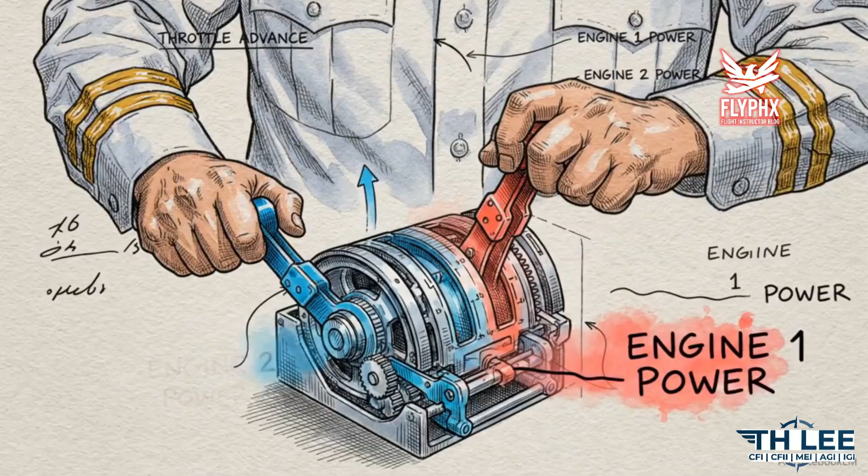To the pilots taking this lesson to advance their skills and careers, this briefing details the specific legal and documentary requirements for professional aviation operations.

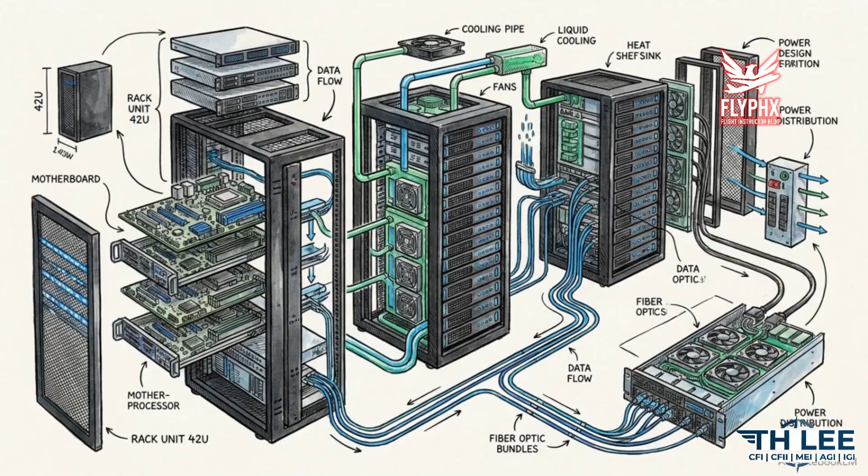Your legal identity as an aviator begins with FAA Form 8710-1. Signing this application acknowledges the Pilot's Bill of Rights and the Privacy Act, allowing the FAA to use your data for certification investigations. This information is integrated into the Safety Performance Analysis System and the Air Carrier Analysis Support System, and it documents your status regarding DOT-required drug and alcohol testing.

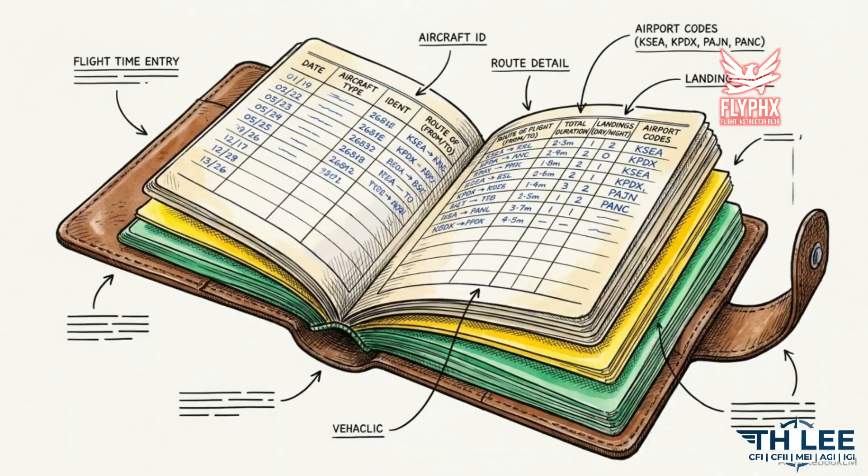Once certified, your operational history must be documented under Part 61. For a logbook entry to be legally binding, you must record the date, total flight time, departure and arrival locations, aircraft type, and flight conditions.

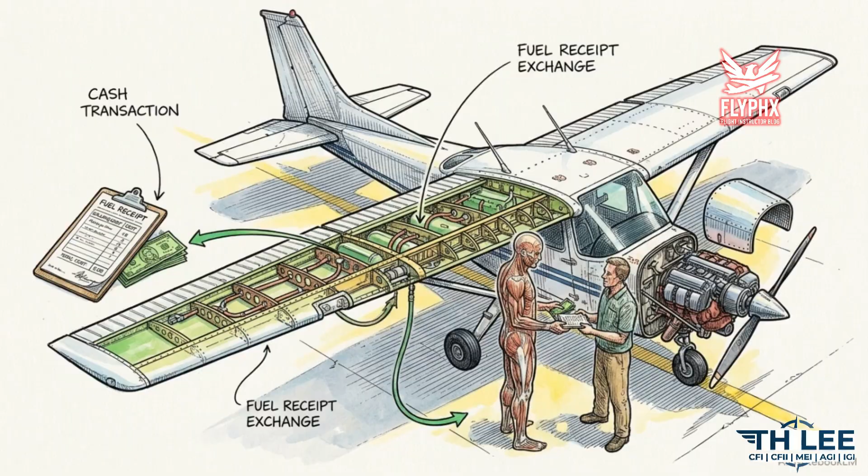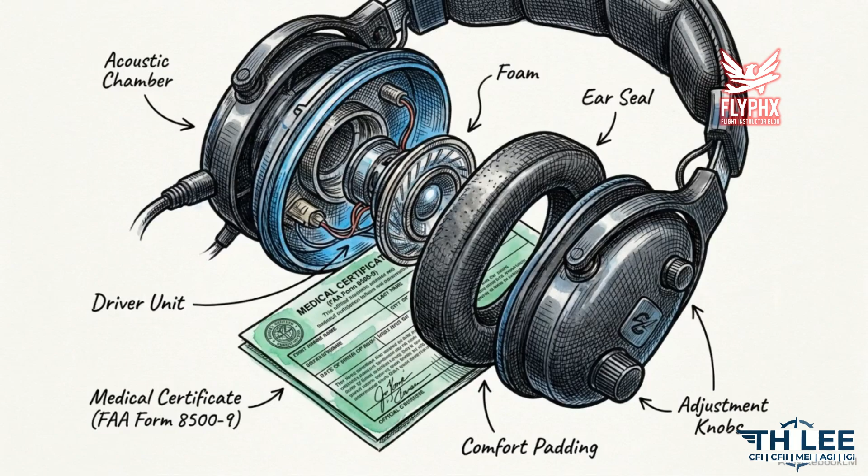Your certificate tier defines your operational privileges. A private pilot is limited to paying a pro rata share of operating expenses and flying for incidental business. A commercial pilot may carry persons or property for compensation, though they face specific cross-country and instrument limitations depending on their ratings. To exercise these privileges, you must maintain a valid medical certificate and meet recent flight experience requirements.

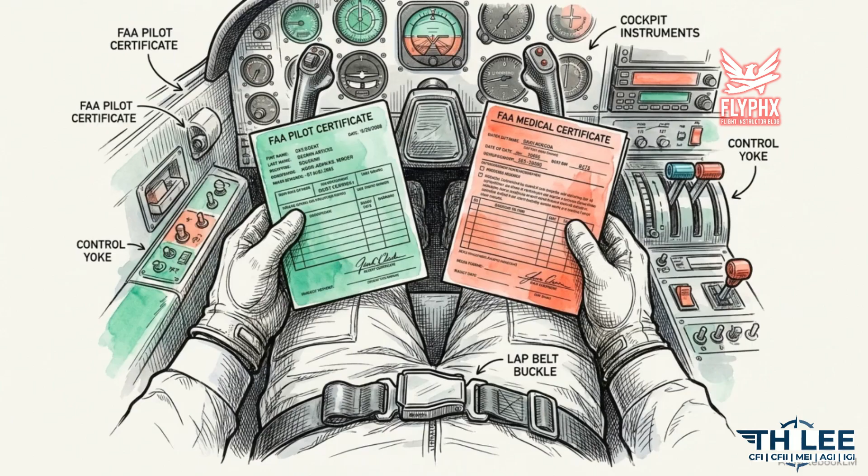Under Rule 61.57, night currency specifically requires logging 3 takeoffs and landings to a full stop between 1 hour after sunset and 1 hour before sunrise. Your authority to act as pilot in command depends on the continuous update of your certification and currency records.

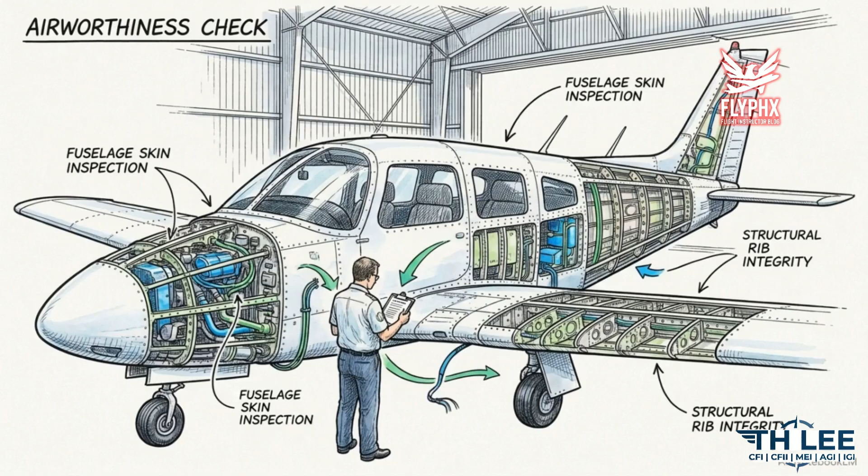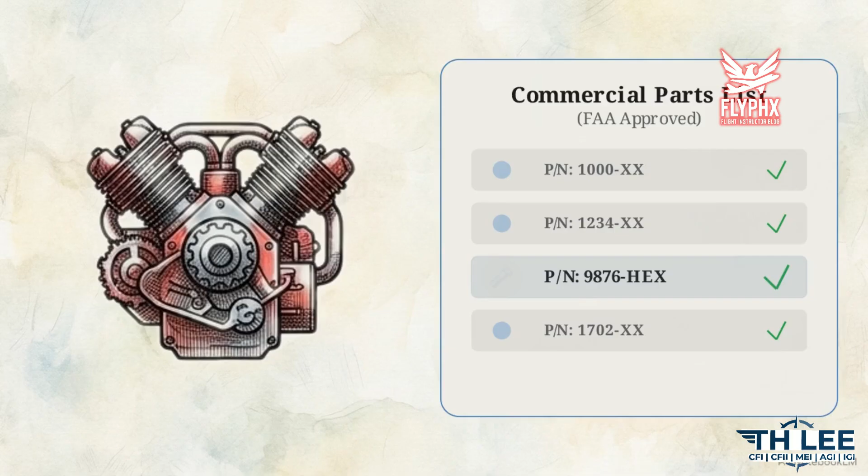The aircraft itself is governed by 14 CFR Part 21. An airworthiness approval certifies that the machine conforms to its type design and is safe for operation. We distinguish between an article, any material or component, and a commercial part included on an FAA-approved list. A design approval defines the aircraft blueprint, while a production approval allows the manufacturer to build it.

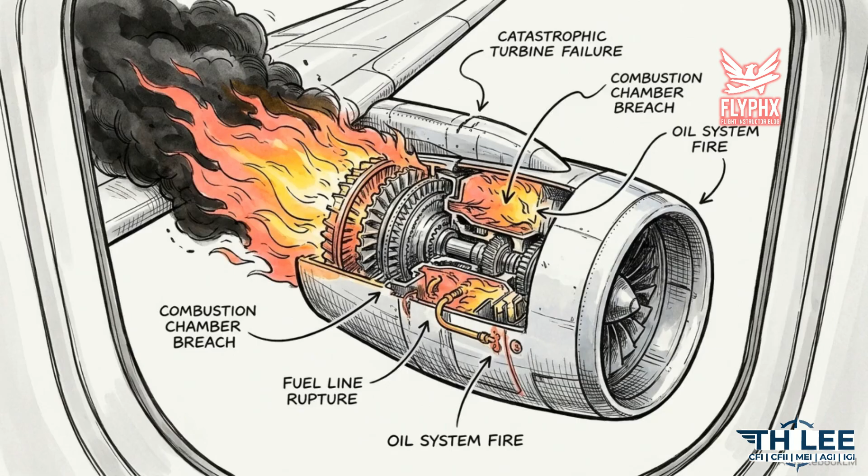FAR 21.2 prohibits the falsification of these records. If a product exhibits a major defect in service, FAR 21.3 requires a report within 24 hours. This mandate covers catastrophic failures, like onboard fires, toxic gas accumulation in the cabin, and primary structural defects.

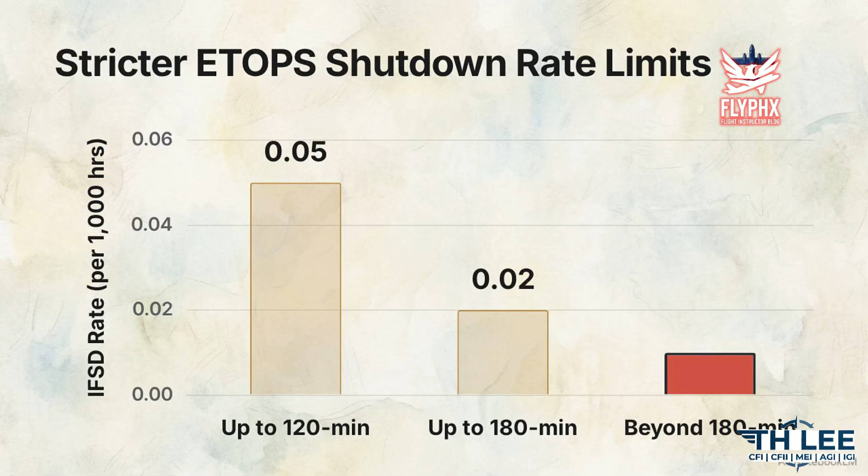For extended operations, or ETOPS, Part 21.4 requires manufacturers to track world fleet reliability. 2-engine airplanes must maintain in-flight shutdown rates at or below 0.05, 0.02, or 0.01 per 1,000 engine hours, depending on their specific approval level. Every operation also requires a Current Approved Airplane Flight Manual, or AFM.

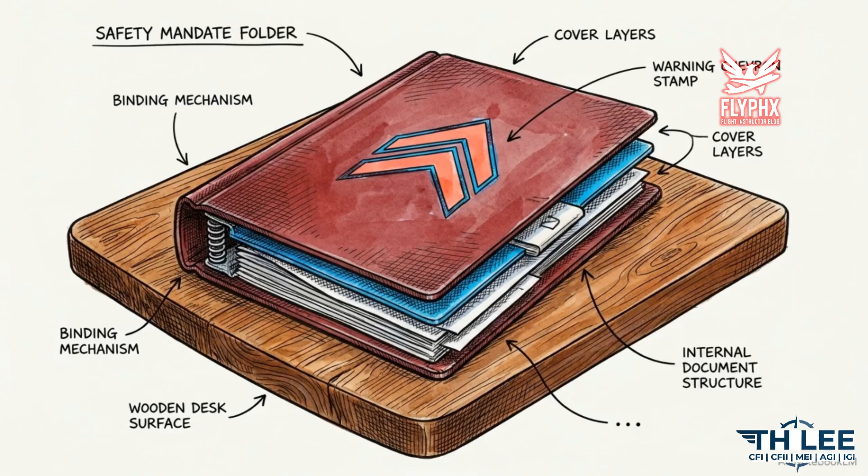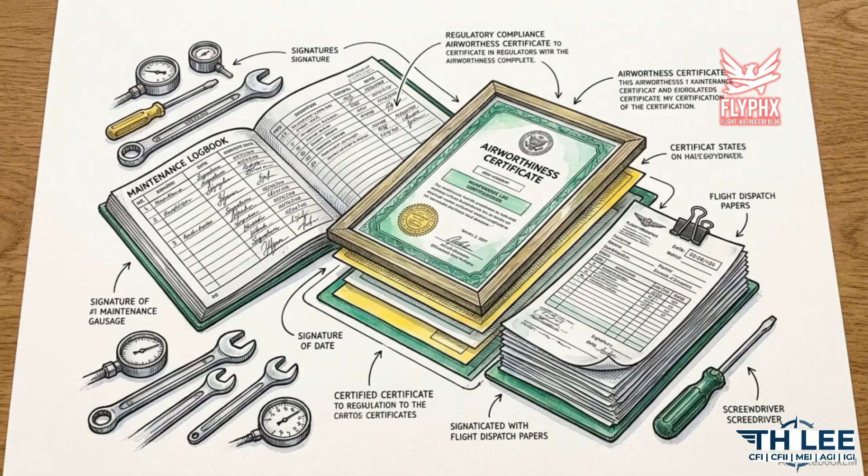Atmospheric physics define the performance envelope of the aircraft. For dispatch planning, you must use area forecasts, issued 3 times daily, and winds and temperatures aloft forecasts, which provide data for 6, 12, and 24-hour periods.

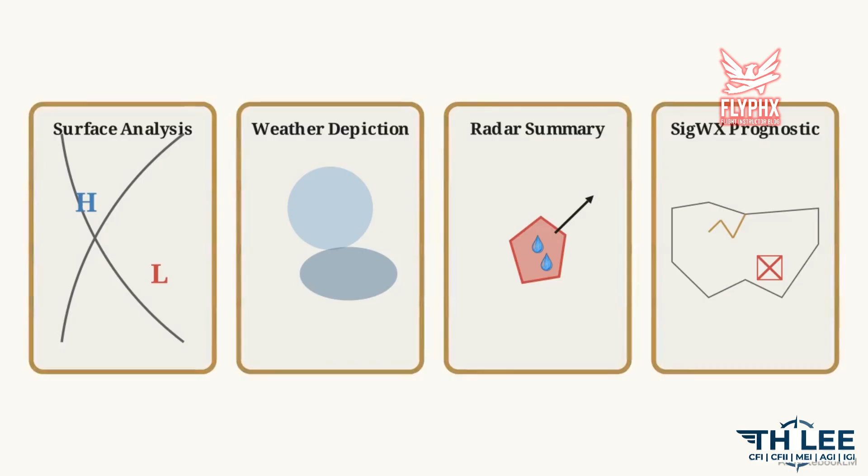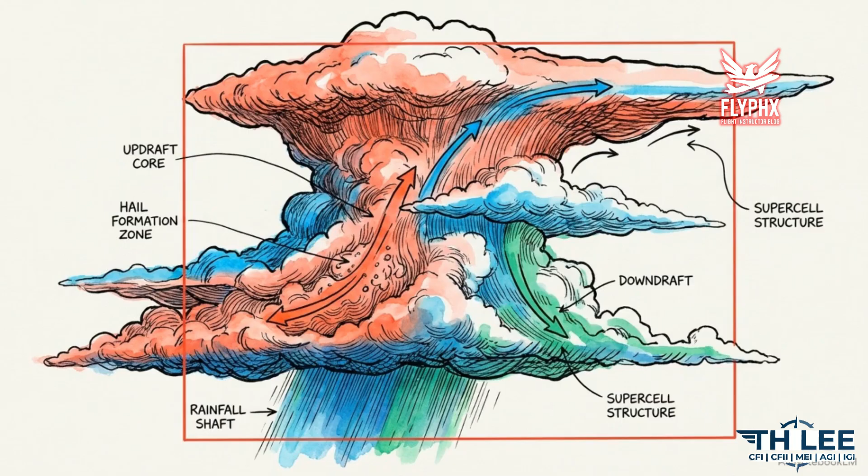Pilots are required to synthesize surface analysis, weather depiction, radar summary, and significant weather prognostic charts. You must also distinguish between hazard thresholds: AIRMETs for weather that may affect safety, and SIGMETs for severe or extreme conditions. This requires a mastery of cloud theory.

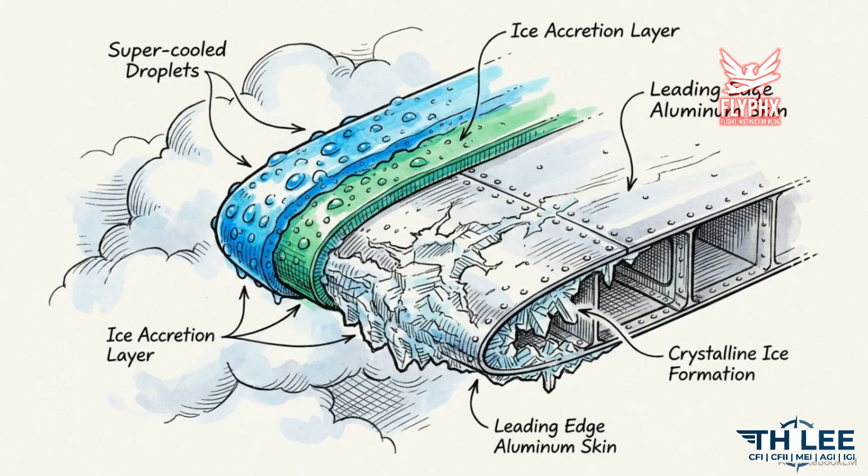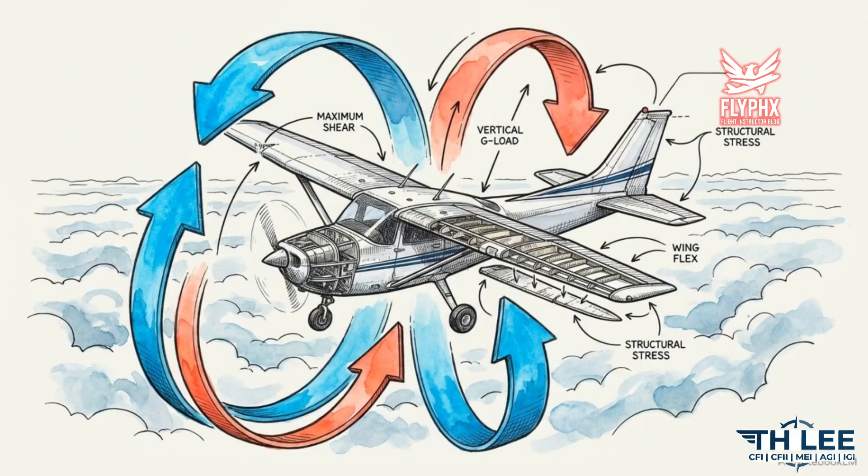Low clouds, from the surface to 6,500 feet, often contain supercooled water droplets that freeze upon contact with the airframe. Middle clouds, up to 20,000 feet, include altostratus layers that pose icing and turbulence threats. High clouds, forming above 20,000 feet, consist primarily of ice crystals.

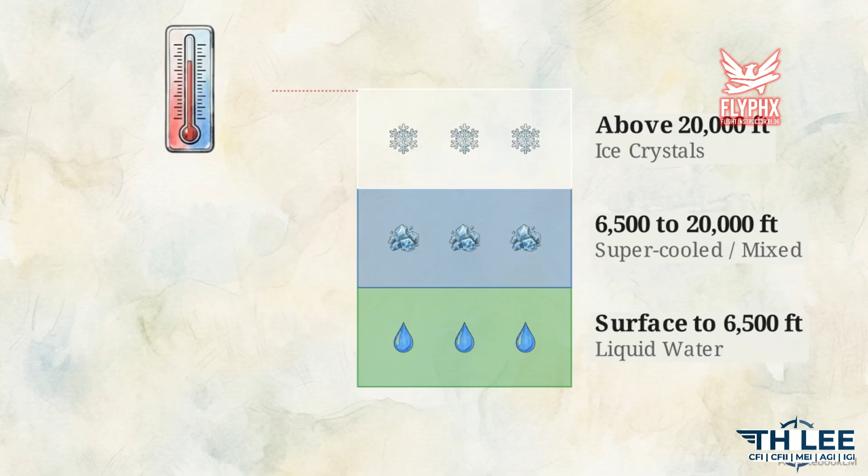Clouds with extensive vertical development grow from low-level bases up to high altitudes. Because of this span, they contain various water formations: liquid, supercooled, and ice, depending on the local temperature and altitude. In their mature stage, these massive vertical structures form cumulonimbus anvil tops. This visual signature is the primary indicator of extreme internal turbulence and severe thunderstorm potential.

Interpreting these charts and visual signatures is how a pilot prevents a legally airworthy aircraft from entering hazardous atmospheric conditions.

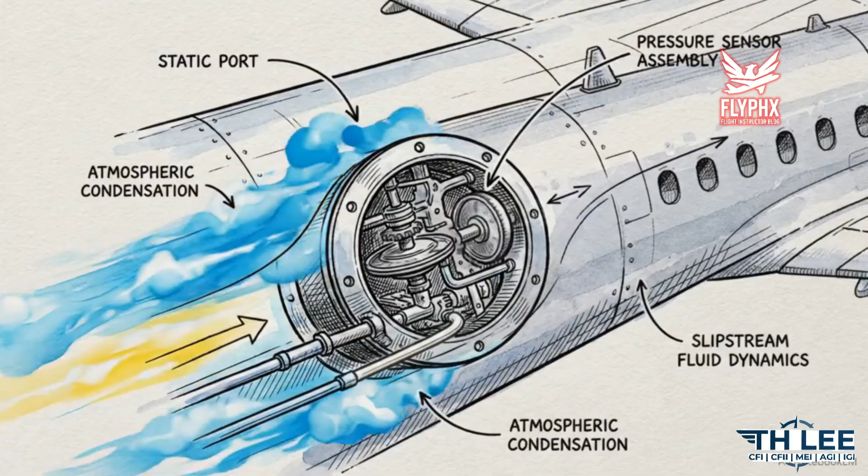We move now to Task C, systems operation. Advanced airmanship requires diagnosing the physical root cause of an instrument anomaly in flight.

The pitot-static system measures ram air pressure against outside static pressure. Whether you use a G1000 or legacy round dial instruments, the sensors rely on these two distinct pressure sources to calculate your airspeed, altitude, and vertical speed.

If the pitot tube is blocked but the drain hole and static port remain open, the airspeed indicator will drop to 0. However, if the entire pitot head is blocked, the trapped pressure causes the airspeed indicator to act as an altimeter, erroneously showing a higher airspeed as you climb.

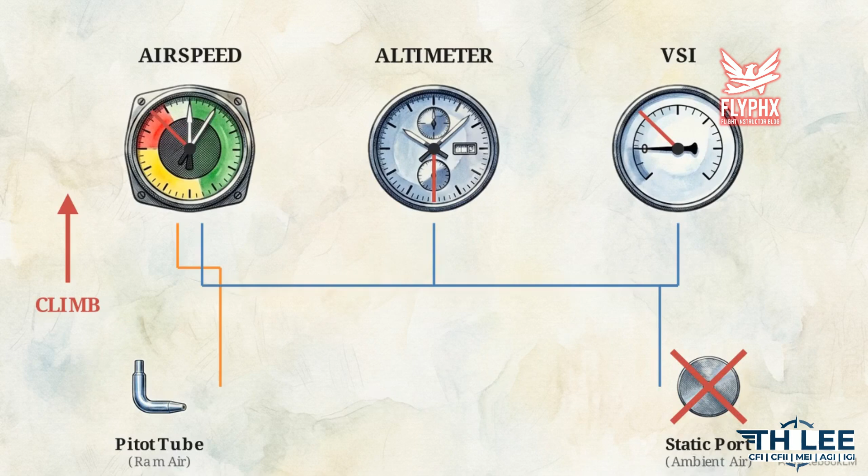A blocked static port freezes the altimeter and drops the VSI to 0. Opening the alternate static port inside the cockpit exposes the system to cabin air, which is lower in pressure due to the Venturi effect. This causes your airspeed and altimeter to indicate slightly higher than normal.

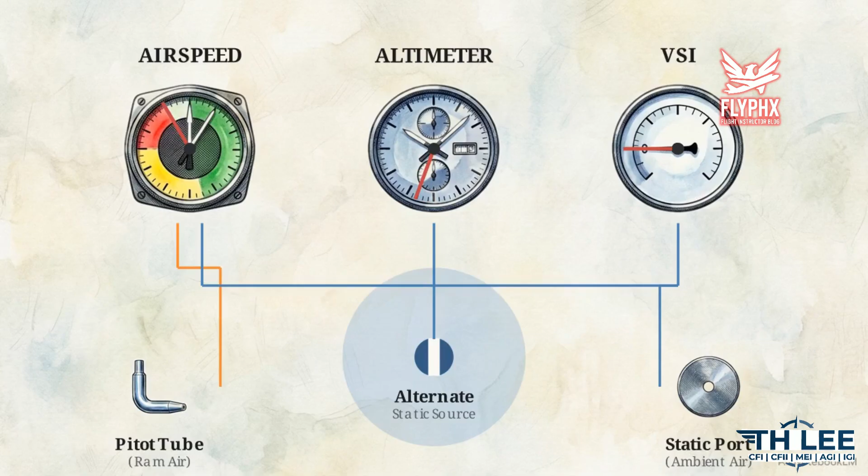You must also monitor the electrical system. An ammeter shows whether the battery is being charged or depleted. A load meter, however, only shows the positive load placed on the alternator, common in 14-volt systems like the Piper Arrow.

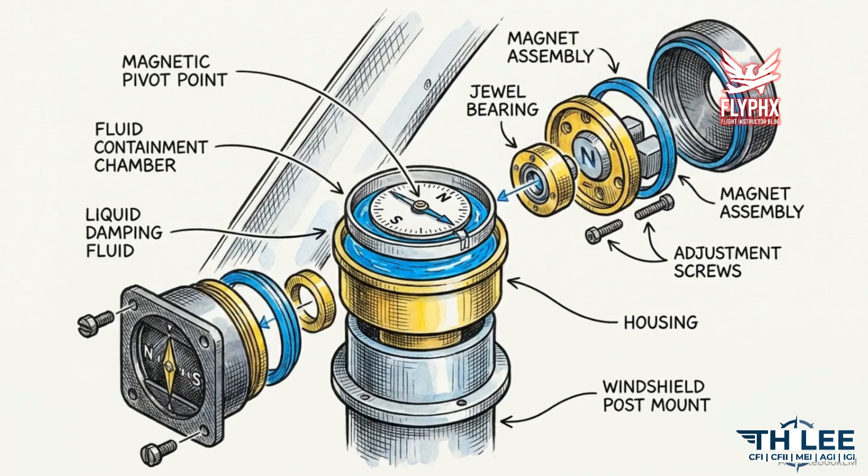If the vacuum system fails, you must rely on the magnetic compass, which is subject to specific errors: variation, deviation, magnetic dip, and turning errors like UNOS - undershoot north, overshoot south.

Accurate diagnosis requires interpreting gauge anomalies as specific mechanical or pressure-related failures.

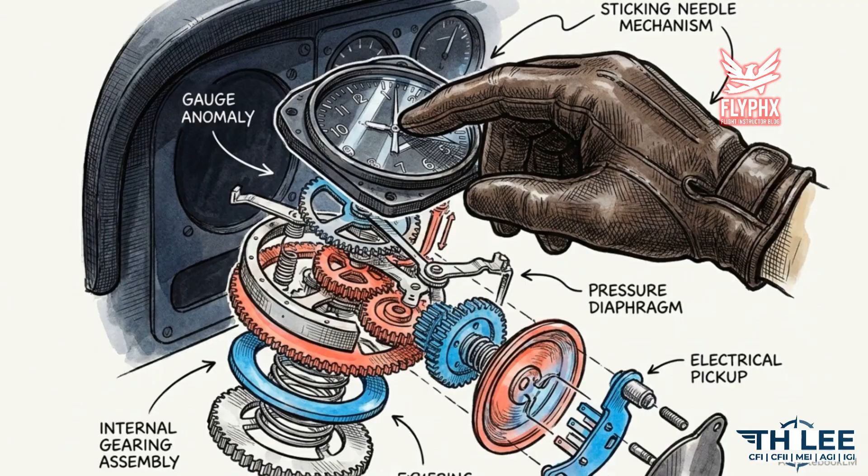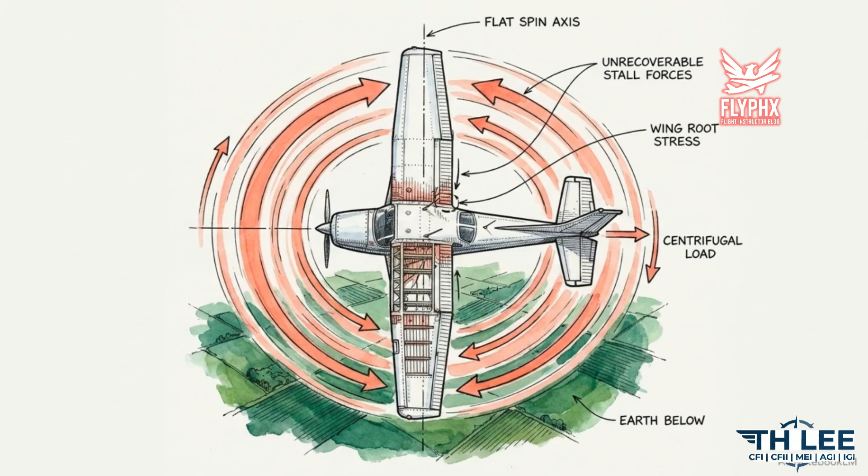Task D covers performance limitations. Performance is governed by the center of gravity. An aft CG reduces the amount of elevator deflection available at low speeds, leading to light control forces and the risk of an unrecoverable flat spin.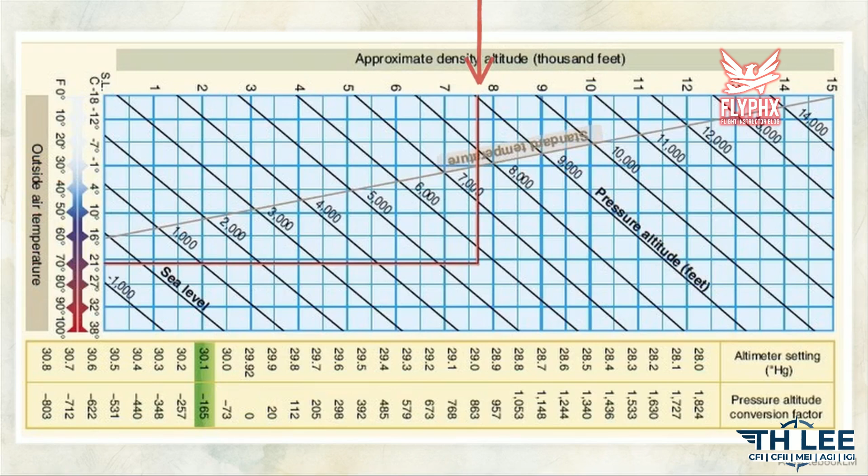This chart is used to derive density altitude. By tracking outside air temperature against your pressure altitude, you find the exact atmospheric density used to predict takeoff and climb performance. This chart allows you to calculate wind limits.

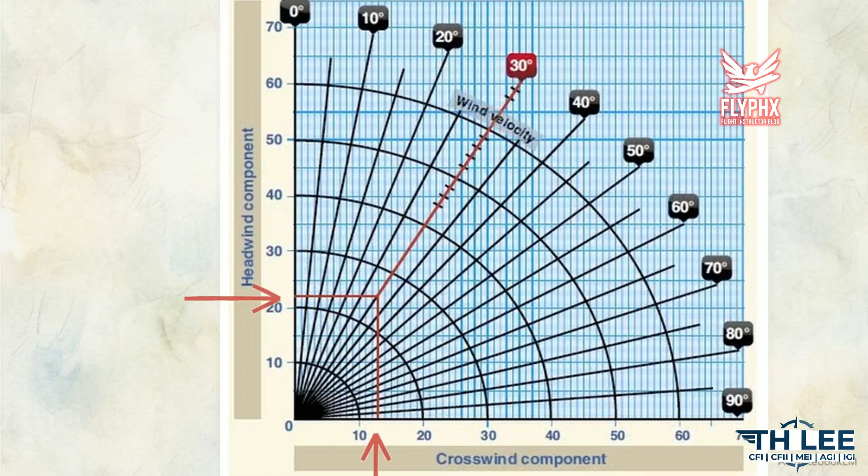By tracing a 30-degree wind angle from the nose, you determine the exact headwind and crosswind components for your chosen runway. This graphical method calculates takeoff distance.

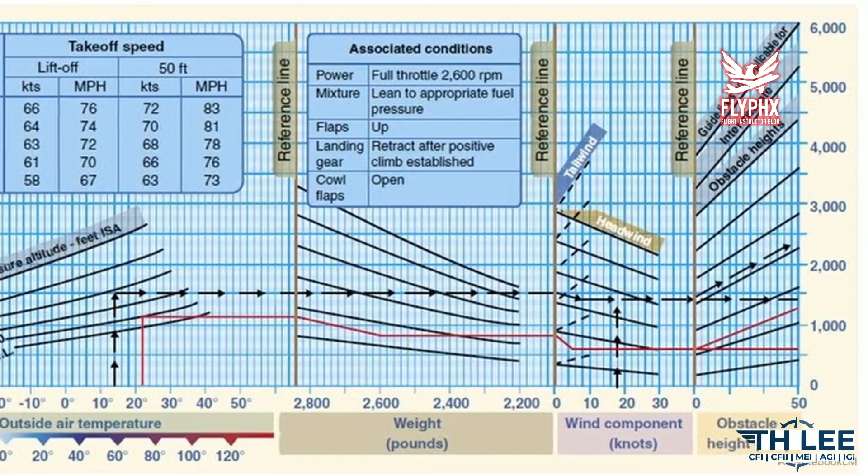You track the data through matrices for temperature, weight, and wind velocity to find your distance over a 50-foot obstacle. Using the tabular method for a 2,400-pound aircraft at a 3,000-foot pressure altitude and 30 degrees Celsius, the calculation results in a 1,060-foot ground roll and 1,984 feet to clear a 50-foot obstacle.

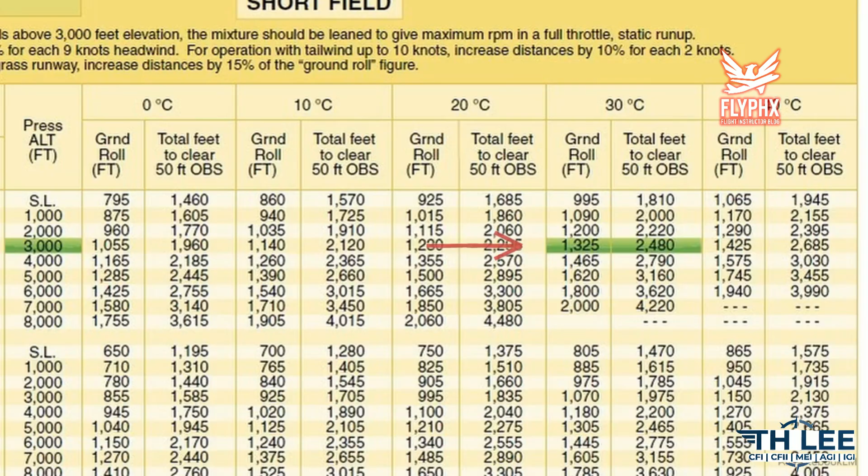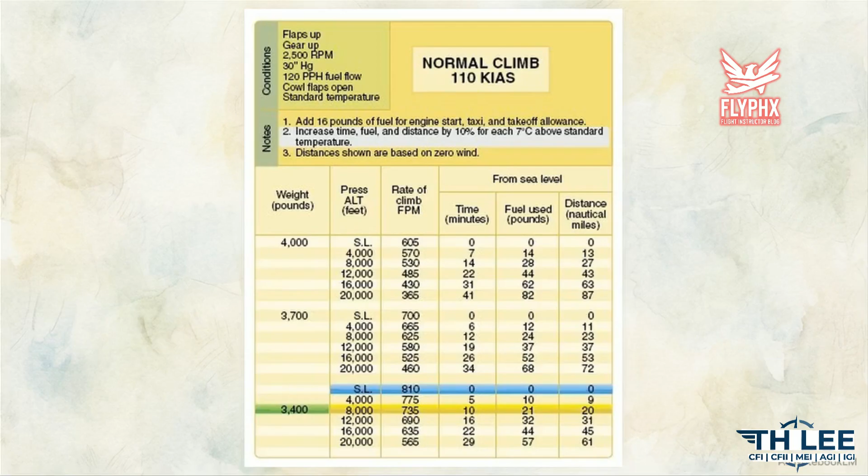This chart provides your climb performance forecast. From the departure temperature, you intersect lines to find the fuel, time, and distance required to reach your cruise altitude. In this tabular example, departing at sea level at 22 degrees Celsius and climbing to 8,000 feet at 3,400 pounds requires 11 minutes, 23.1 pounds of fuel, and covers 22 nautical miles.

This chart determines cruise power settings. At 6,000 feet under ISA plus 20-degree conditions, the table identifies the manifold pressure and fuel flow needed for maximum continuous performance. Finally, this table dictates range and endurance.

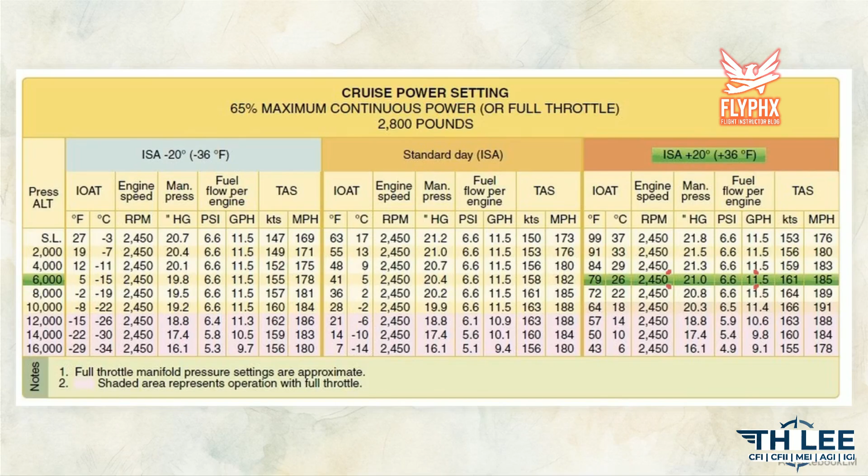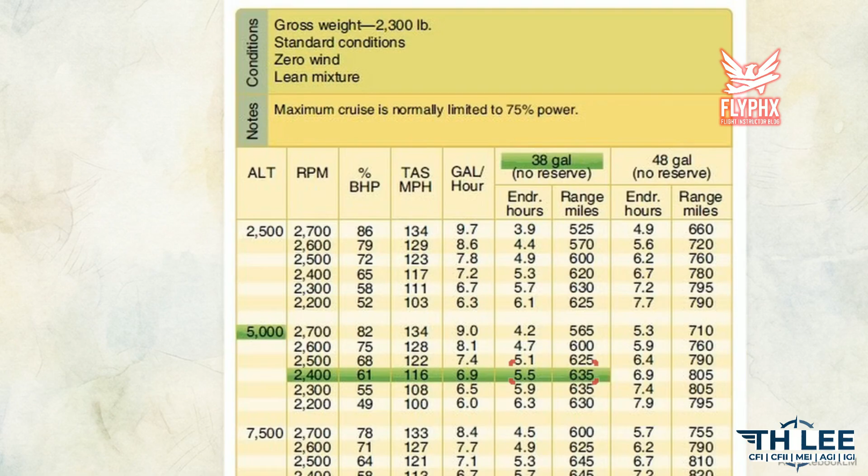At 5,000 feet and 2,400 RPM, with 38 gallons of fuel, the aircraft achieves 5.5 hours of endurance and 635 miles of range. Precise charting converts atmospheric physics into survivable dispatch parameters.

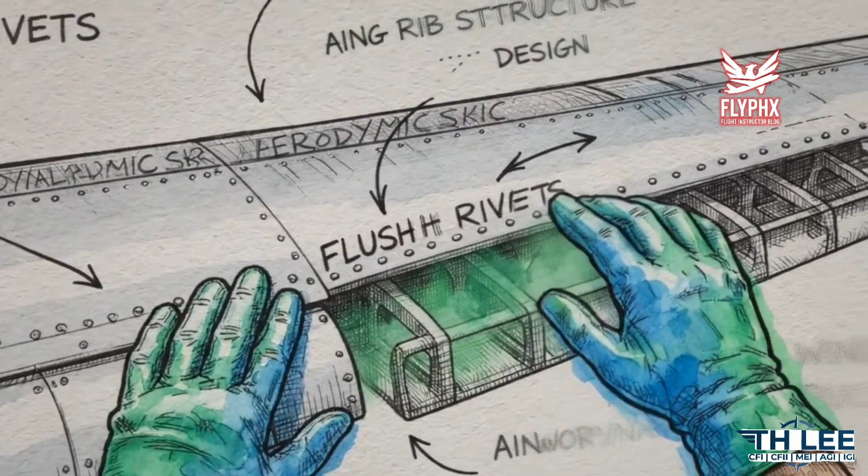Task E details airworthiness requirements. Airworthiness means the aircraft conforms to its type design and is safe for flight. Every pilot must distinguish between the FAA-approved Airplane Flight Manual and the manufacturer-developed Pilot's Operating Handbook, which contains 9 standardized sections for aircraft operation. The pilot in command is responsible for verifying airworthiness through maintenance records.

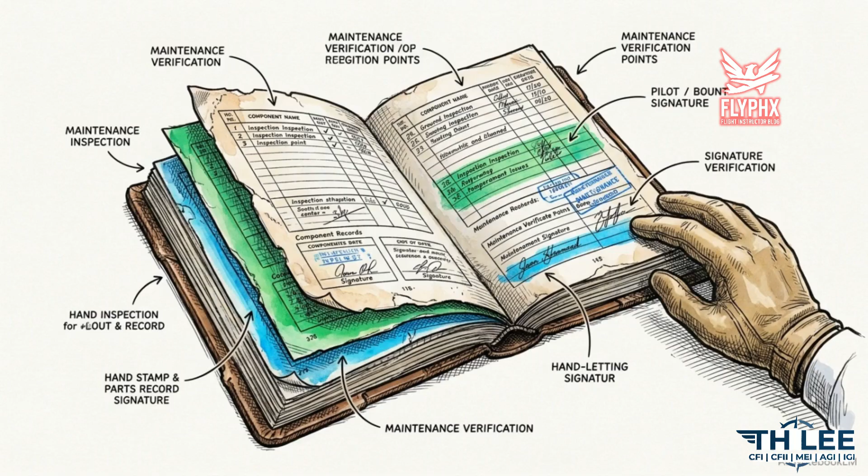This includes checking for the completion of required annual and 100-hour inspections. Every legal logbook entry must include a description of the work performed, the date of completion, and the signature and certificate number of the mechanic approving the aircraft for return to service.

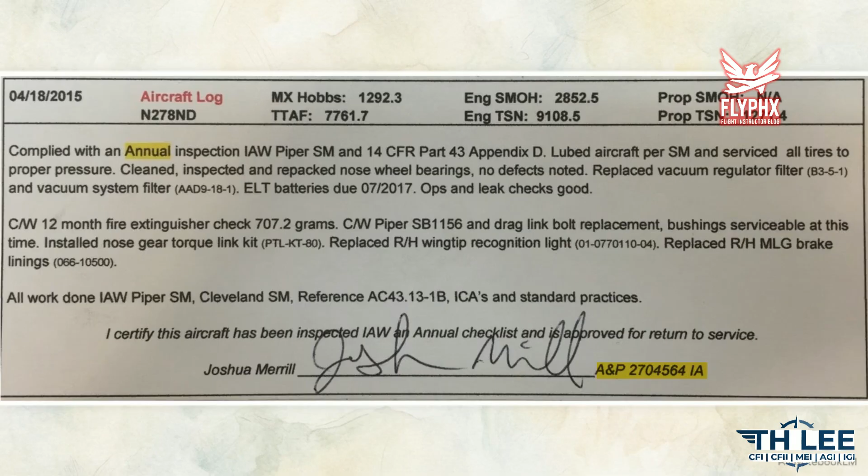This entry is a real-world example of those requirements. You can verify the date, the signature of Joshua Merrill, and his A&P certificate number with the inspection authorization rating. Ultimately, the aircraft's capability for flight is legally granted by these endorsements, linking physical maintenance to regulatory approval.

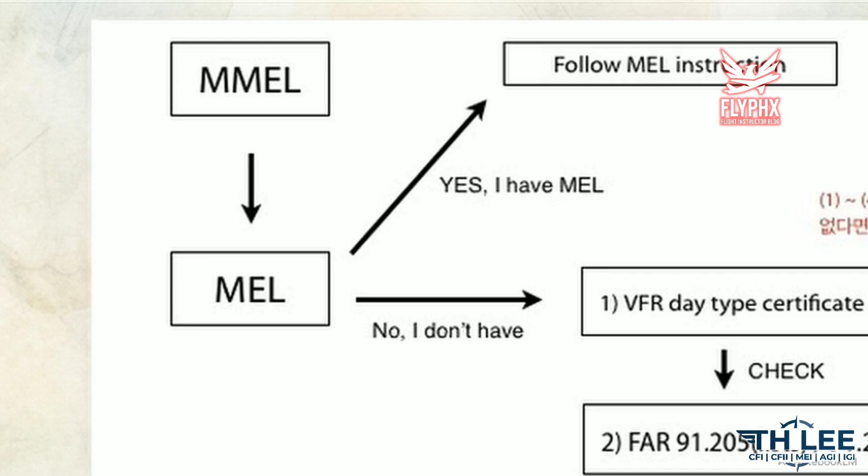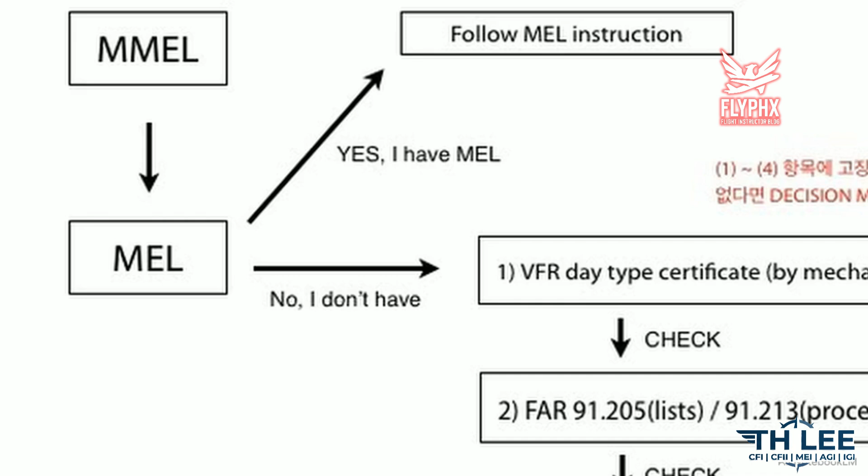If equipment is inoperative, you must follow a deferral process. If the aircraft has an approved minimum equipment list, or MEL, you must follow its specific instructions for dispatch. Without an MEL, you must check if the item is required by the VFR Day Type Certificate, CFR regulations, the POH equipment list, or airworthiness directives.

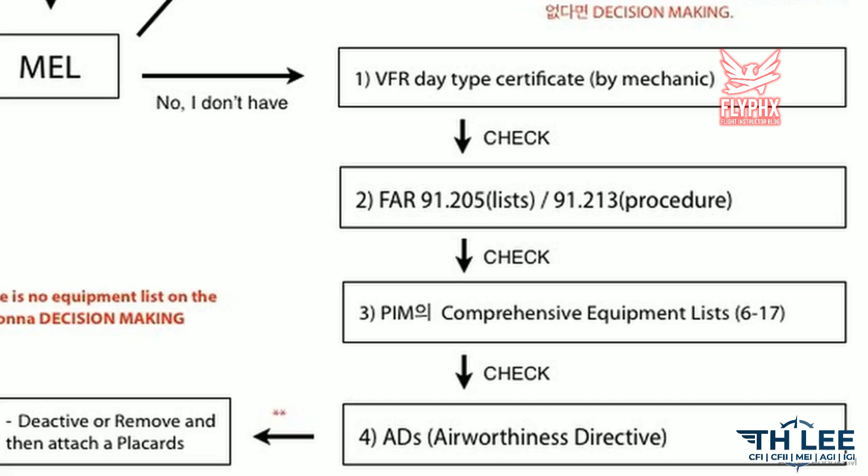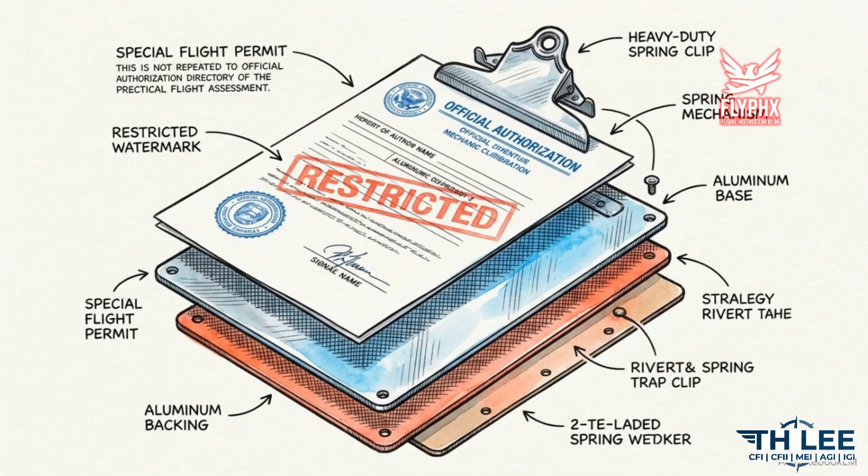If not required, it must be deactivated or removed and legally placarded as inoperative before flight. If the aircraft is not airworthy but capable of safe flight, CFR 21.197 allows for a special flight permit. These are issued by a local FSDO or DAR for purposes such as flying to a maintenance base or production flight testing.

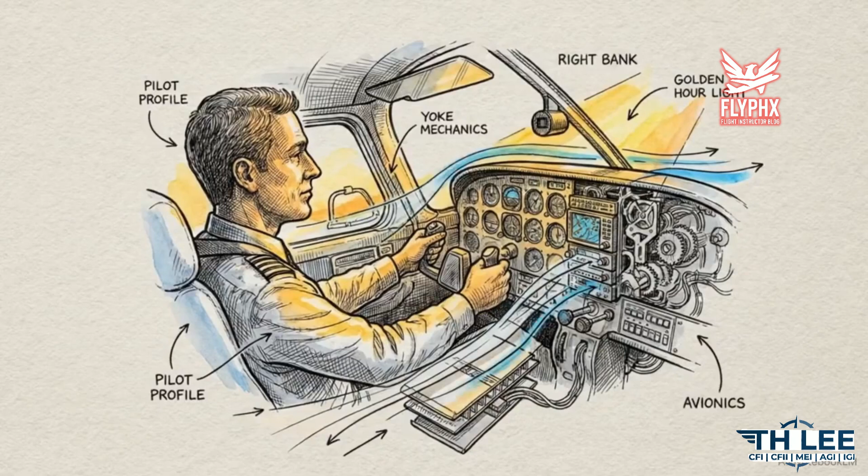Professional flight operations integrate stick and rudder skills with the rigorous management of regulatory and environmental data.